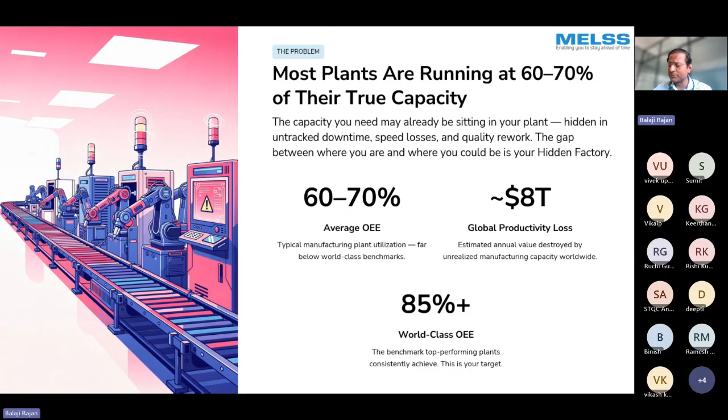If you are in the 60 to 70% range, maybe you are within the slightly higher range. Now, what is the hidden factory? Let's explore the hidden factory. What do we mean by hidden factory? Where does the unrealized capacity I'm talking about actually come from? This is typically buried across 4 loss categories that most plants are not tracking regularly, or don't know how to track, and they typically fall under these 4 categories.

It's unplanned downtime, where equipment stops are not tracked or logged, or not understood in real time. Unrecorded downtime is lost, and that's revenue that cannot be recovered. It can also be in the form of quality defects and rework, units that consume machine time but don't produce any saleable output. They just go into your rejection or contribute to your cost of poor quality. This is cost consumed with no output. This rework is basically what we call a parallel factory.

Then we have speed losses, basically machines running slower than their rated capacity, due to multiple reasons such as wear and tear, incorrect settings, or operators not knowing how to operate the machine correctly. These are all invisible factors, but they are relentless, always there, invisible, and always detrimental to your operations. And of course, the fourth one is changeover inefficiency, excess setup time between production runs. There can be maybe a large 30-minute changeover between your lines or products, causing unrecoverable loss of man hours.

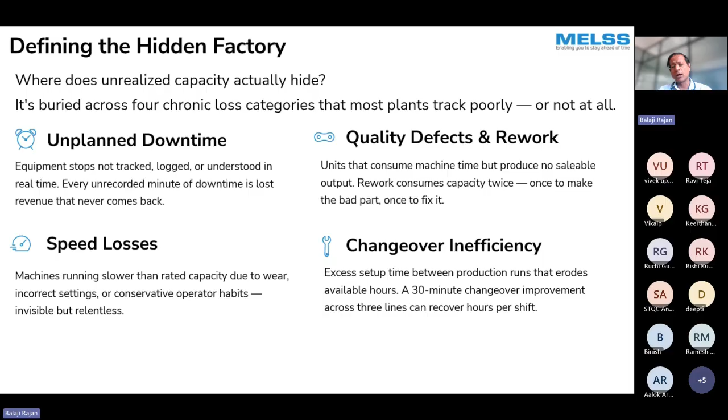Now, the challenge is very simple. The root cause of hidden inefficiency is actually the invisibility, or rather the fragmented visibility of information across the shop floor. Basically, your systems don't talk to each other, and if they're not talking to each other, the plant cannot learn from itself. If data isn't shared between different systems and departments, you cannot learn from each other and cannot make improvements.

So what does a fragmented system look like? Let's go through this. On the left-hand side, we have the before, which is fragmented. Basically, your MES, ERP, and SCADA systems don't talk to each other. They're all standing independent of each other, operating independently.

Operators are logging issues on paper or spreadsheet, but that data is already stale by the time it is reviewed and any action can be taken on it. Decisions are made days or hours after the event, and they're typically reactive, not proactive. There is no single source of truth for line performance, so every shift, every operator tells you a different story because the data is being logged, tracked, and analyzed on a delayed basis.

So this is what we call a fragmented system. This is the before system.

Now what is after? What is your North Star? What is it that you would want to aim towards? It's to have a connected shop floor. And what is a connected shop floor? It's basically a unified data layer across all the machines and systems, giving you one version of the truth.

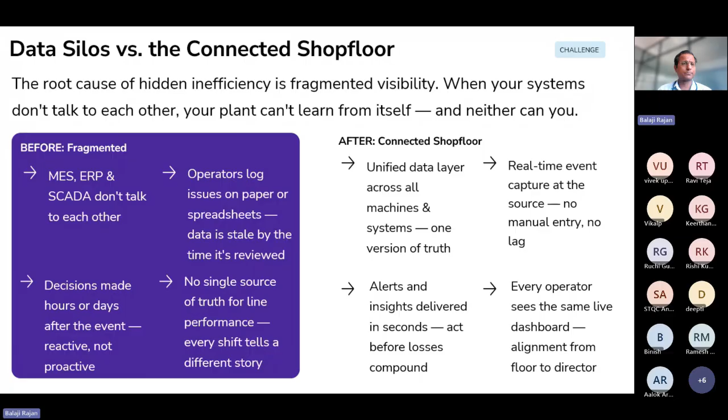Now, the basis for understanding the health of our shop floor, our operations, our manufacturing, is all encapsulated within one terminology: OEE, or overall equipment effectiveness. It's a common terminology that everybody within operations knows. And if you don't know, please get to know this - this is your best friend.

It's basically a simple formula: availability into performance into quality. These three parameters capture your entire performance across your shop floor. It's the single most powerful metric, and it's very useful for exposing your hidden factory. It is the starting point for every improvement initiative.

Just to give a brief background - what is availability for people who don't know? Availability is the percentage of planned production time that the machine was actually running. Downtime is planned and unplanned, and unplanned downtime is what destroys this metric. You typically want at least a 90% target for availability.

What is performance? Performance is basically whether your machine is running at full rated speed and capacity. If your speed or capacity is reducing because of losses in wear and tear, wrong settings, or operators not operating it correctly, then your throughput reduces. Here again, your target should be greater than 95%.

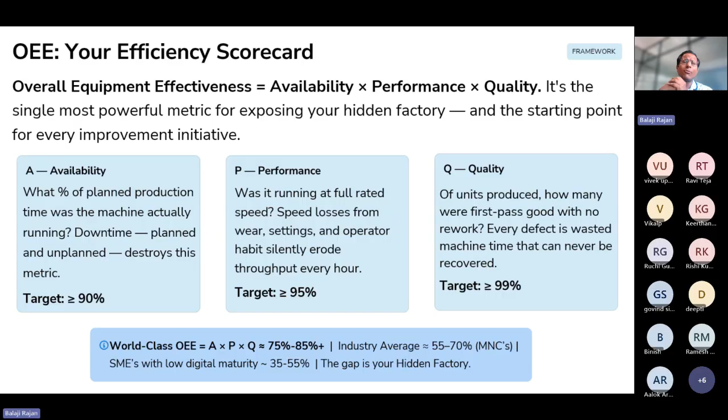Your industry average can run anywhere between 55 to 70% for MNCs, and it can be lower for smaller SMEs with lower digital maturity, maybe about 35 to 55%. This low number, the 35 to 55%, is the gap, the hidden factory. This is what I am talking about. Typically, MNCs have larger digital maturity and smaller SMEs have lower digital maturity.

To build this capability is the basis of unearthing your hidden factory. Now you can get data from the OEE, identify where your problems are, and we will get into more details as we go forward. But how do we then do this? This is the digital aspect of it, gathering the data for OEE and understanding your performance.

Now there is a physical automation stack also, and it can encompass what I'm showing below. These are typically electromechanical technologies that can attack the waste directly in the plant, and they can attack a specific category of OEE loss.

What are these electromechanical technologies? These are not all inclusive, just some of the technologies. I'm sure there are more out there, but these are some of the more important ones we use for automation. There are industrial robots, which we are all familiar with - high speed and high precision arms. You've got cobots, or collaborative robots, capable of working safely alongside humans.

You have vision systems, which are AI powered cameras providing for inspection of 100% of parts inline. You've got smart conveyors - sensor equipped conveyors with variable speed control and routing logic. You've got smart actuators and IIoT, industrial Internet of Things products - basically servo drives, smart PLCs, and edge connected sensors that can stream machine state data directly from the shop floor, useful for providing even product or part level information. And finally you have AMRs, autonomous mobile robots, which provide for routing of materials dynamically throughout your shop floor or warehouse.

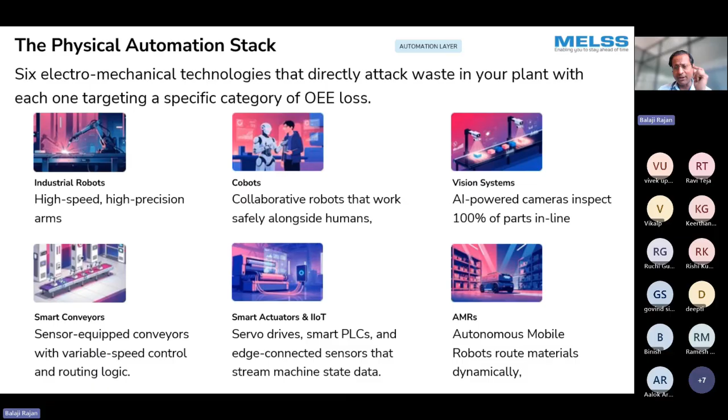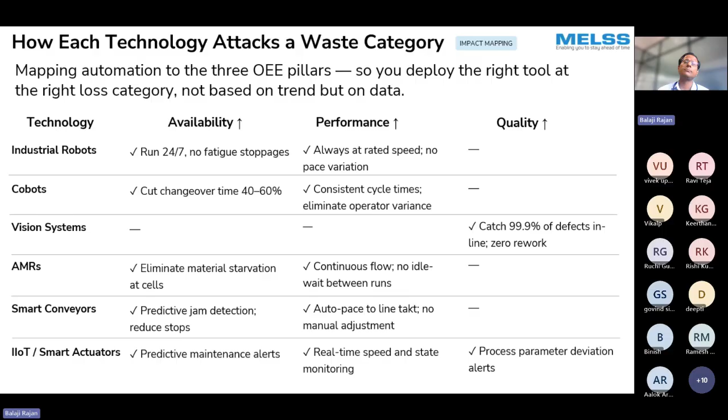Now, what is the first step in an OEE process is to find the real bottleneck, and you use real-time analytics to do this. So your line is running at the speed—we all know that the bottleneck forms the speed at which your entire line runs. The slowest operation is the speed of your total line.

So you can use real-time OEE analytics to pinpoint exactly where the slowdown is happening. You don't have to guess. You can get actual data and identify the station where this process is slow, and then fix the right place at the right time.

If I was to summarize what we are doing through OEE, we are first sensing—basically using your IoT sensors to stream machine data every second. There is no manual data entry, no shift-end delays. You're not having people entering data at the end of the shift. So this is all real-time data, sensed using the sensors.

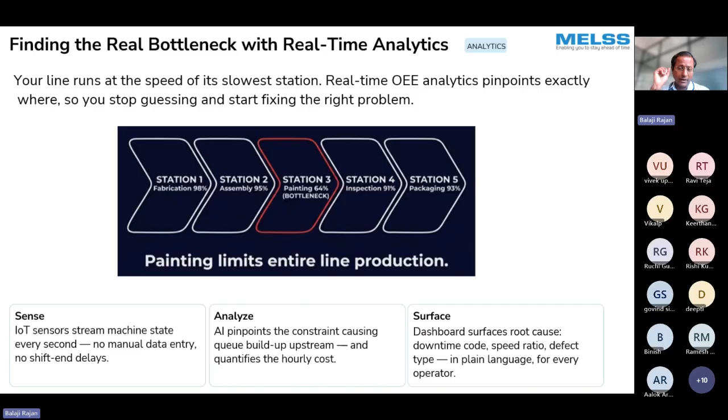So this is your analytics. Now, basically, like I mentioned, the Industry 4.0 toolkit consists of four basic categories. There are four integrated layers, what we call our digital layer, which is driving our physical automation.

Each layer is feeding the next layer of process so that it can do an analysis, and then provide the input to the physical automation. So you've got it: your data informs the analytics, analytics directs the automation, and the automation triggers the action.

Here we call it the connect, the IIoT or the edge sensors, which can be through your protocols like OPC UA and MQTT. Integration is happening. You've got smart conveyor telemetry coming in, or maybe a unified machine data layer. All these are the data or connect that is happening at the shop floor level, at the machine level.

This is then analyzed. This is where you have your real-time OEE dashboards, and maybe artificial intelligence or machine learning software that is detecting anomalies. You might even have simulators, digital twin simulations happening today that can provide live bottleneck identifications.

This analysis then provides the inputs to what automation you need to implement. Based on the analysis of where your loss category lies, you might want to do robos and cobos, or put in an AMR, or maybe a combination of the two. Maybe for your quality gateway to improve, you want to put in some vision guided sensors.

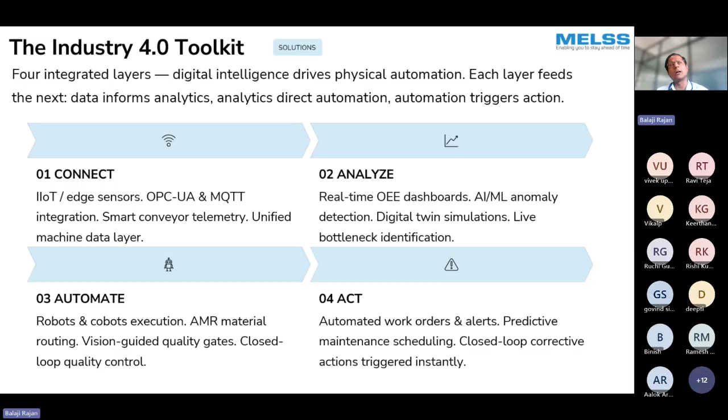These four steps are critical in how the entire digital system and the physical automation loop form a closed loop, and allow you to—again, the basis of this entire presentation—unearth the hidden factory by identifying your loss categories, your issues and problems in real time, and directing the correct automation or physical automation stack, or analysis aimed at the problem, to provide the solution.

Now, it might seem logical, but some people do ask, okay, so why should it be both automation and digital intelligence? Can't I just do OEE and that should be enough? Or let me just do automation. I know I have a problem with throughput, let me just input it. Or quality, let me just install a vision system, or install a robo or a cobo, and I'll solve my problem.

It's not that simple. There are economies of scale—if I was to use simpler technology, there is a compounding effect of utilizing both these things together. The digital intelligence that comes through the OEE analysis and the physical automation work together to give you a compounded output, which is better than utilizing each of these individual solutions separately.

So if I was to implement just digital only, you might get maybe a 10 to 15% OEE gain. Yes, today you have dashboards and your analytics are revealing the waste. But then you still have humans executing it very slowly, with variation between different humans implementing it differently. So you have the insight, but without the correct action, the output is limited and has a ceiling.

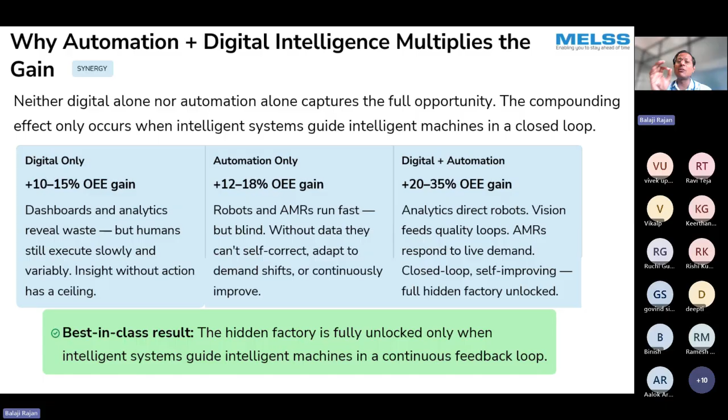So the best in class result is always the hidden factory. It is fully unlocked only when the intelligent digital systems guide the intelligent physical machines in a continuous feedback loop. This is very critical.

So I've spoken quite a bit about how we approach what it is that we do. Let's look at a simple case study here. This is not an Indian context, I've given you maybe an American context here. But again, this is an SME company, and I focus a little on SME companies because their data and digital maturity might be lower, their automation maturity might be lower, and really the ability to unlock this hidden factory is higher in some of these SME companies.

So let's take a case study of this SME company. This is a company based out of Ohio, making sheet metal fabrication as a tier 1 vendor into the automotive business. They were a small SME company, somewhere between 51 to 200 employees. Here I'm taking a very specific case of a UR10e cobot that was installed.

How did they do it? Before, they identified that their CNC and welding cells were a constraint for them. They had an OEE of about 52%. If you take the baseline, they had a welding throughput of say 1x, that is the baseline. And their CNC machine utilization was about 32%, and they were only doing the day shift.

Now, they needed operators across 4 cells, so they needed 4 welding operators across these 4 cells. And the defect and rework rate was almost 3.8%, which is pretty high. And they couldn't do any lights-out production, that is, there was no night shift capability, maybe because they weren't able to get labor or manpower to staff those night shifts.

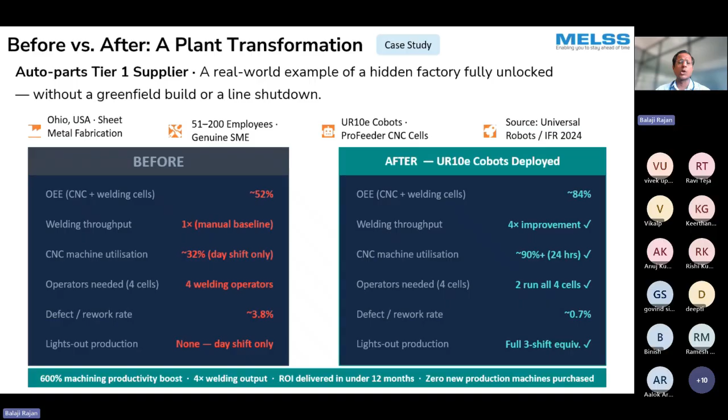So these are some of the numbers that came out through the case studies. Let me reiterate, this is for SME companies, and typically SME companies have a lot of gaps, and a lot of improvement can be realized at very good ROI by implementing such plant transformations as I've shown. This is not the only way, this is just one case study. There are multiple technologies that can be implemented for various loss categories and improvement situations, and the ROI can be calculated for each of these situations.

So what's the roadmap? You've seen what can be done. Let me tell you, this roadmap is the same whether it's a large MNC company or a small scale company. It's a very practical 3-phase implementation path you can follow. You first start digital. You need to start collecting data, doing data logging to get your information in real time. Let the data tell you where to automate. Then you deploy the physical automation exactly where it has to have the highest return.

The first phase is what we call sense and see. You can do this between months 0 to 3, where you deploy the IIoT sensors and edge boxes or edge gateways on all the lines. You connect all the MES, ERP, and SCADA data to create a single unified data layer. You launch your live OEE dashboard for every operator, or a consolidated OEE at a central monitoring location. You use this OEE data to identify the top 3 bottlenecks with data, not on opinion, not on feeling, but on what the data is actually showing you.

The second phase is what we call automate the bottleneck. This can be done between months 3 to 9. You deploy the Kobo or Robo at the identified constraint station, install vision systems, maybe on the highest defect rate step. I'm just giving you different automations you could implement. Or maybe you deploy AMRs for the top material flow routes, wherever you have routes with the maximum material flow. Finally, you validate the OEE lift: what is the baseline, what is the target, what is it currently, is there an improvement and what is improving. You do this line by line wherever you have identified these issues.

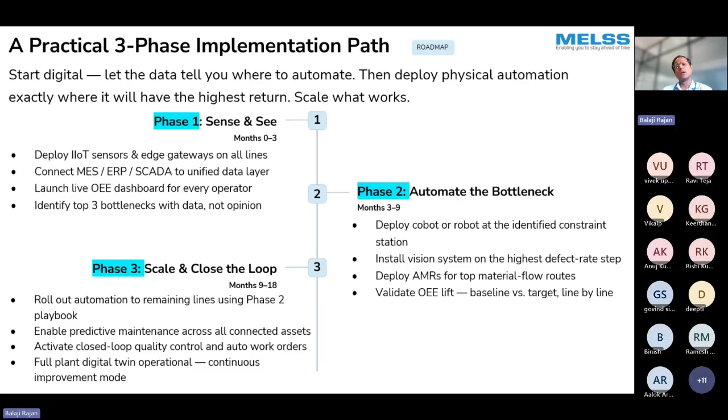So this is a practical three-phase implementation path, or a roadmap, that any company can utilize in their systems, right? Now, let me take a little bit of a deviation.

I was telling you about how to identify the hidden factory, what are the technology involved, how do you do it, how do you unearth it. But there's a step that happens even before this, and this is applicable whether you're in sales and marketing, or a business development executive in an automation company looking to work with another manufacturing company. This holds true also if you're a plant head, an operations head, an engineering head, or a lean practitioner within an organization getting started on the transformation process within your own company.

Because let me tell you, even within your own company, you're going to have hurdles. You're going to have conversations with decision makers where you have to show, convince, or prove that what you are doing is correct, and whether the path you're taking is correct, right? So the next few slides will take you through how do you run this process, how do you start the conversations, what are the questions you ask, and how do you do this process of transformation within your own company, or if you're a sales and business development executive or a lean practitioner for other companies.

So the best entry point to start is to identify a specific operational pain. Now typically, whether you're external people or internal people, you're working with your plant directors or operations head. It could be a CTO, a CEO, a CFO, it doesn't matter. You have to answer to these people when you say, hey, listen, there's a specific operational pain that I want to address. But you also need to be able to speak the language - it can be takt time, throughput, OEE, cost of poor quality, it could be in terms of SPC, but you need to be able to speak the language of the shop floor.

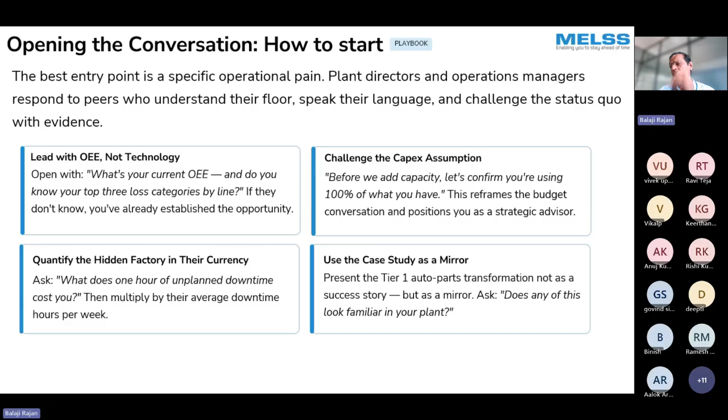I want to reiterate, everything I'm saying here is applicable whether you're internal to the company trying to do automation within your own company, or whether you're an external sales and business development executive in an automation or system integrator trying to do automation implementation within other companies.

Now, these are all questions. And like I said, there are decision makers at the senior most levels, your C-level executives, etc., who are going to be asking you questions about why you're doing what you're doing. I'm just highlighting here some of the questions that come up. In our experience, we have done this quite a bit, and these are some of the things that come up. You also need to be asking the right questions towards the right people.

This is also very critical. Please know that you can't ask the same question at the operations or operator level as you would the CEO or CFO. They'll be thinking about completely different things than the operator level.

So OEE and capacity questions could be anything. What's your current OEE by line? If you could add 25% throughput without new equipment, where would that capacity go? Towards your orders, margins, or both? How often are you running at full rated speed across every station? What was your worst downtime event? Did it happen last quarter, this quarter? And how long did it take to diagnose your root cause?

These are all questions that a good manager or an operation head should know in order to run their operations well. It might be an operations manager, it could be at the operator level, it could be at the CTO level, it can be at any level, but these are information that people need to know. Only if they know this can you be confident that they are running their operations well.

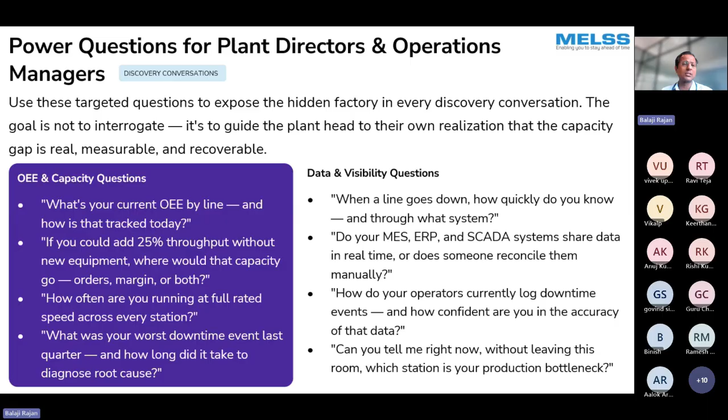So these are all powerful questions that need to be asked. And if you're finding that there are no responses or the responses are poor, whether you're internal to the organization or external driving this, these are important questions, and the responses will tell you the health of the existing system. It will help guide your conversations towards directing plant heads, CEOs, CFOs, or operations managers towards implementing these transformations.

Now, typically you will start off, there are two types of conversations you can have, and only one guarantees a strategic win. So when you're into industrial automation, the first conversation everybody asks is typically equipment selling. Everybody's like, I want to put in a robot, I want to put in a cobot, and you're always talking about the equipment. The question is, can your robo weld this joint? Can your system improve this? Can your system equipment help me with this?

Now, that decision and that buyer and that problem is at a very different level, whereas the transformation you're selling is a very different question. The question at the highest level is, can you reduce my unplanned downtime by 30%? I am not talking about equipment, I am not talking about selling a product, I'm talking about the transformation. Can you reduce my unplanned downtime by 30%? Or, I can reduce your unplanned downtime by 30%. This is the conversation starter for transformation, this is where we need to start. And these are decisions typically taken at the CXO or plant director levels.

The buyers, the people making decisions on these investments, are typically at the CEO or head of manufacturing level. We have evaluations being done at the business case and ROI proof levels.

We have key variables: transformation, credibility. These variables are critical. Transformation credibility comes from asking the right questions and providing the right solutions. The relationship is that you're coming in as a long-term solution provider.

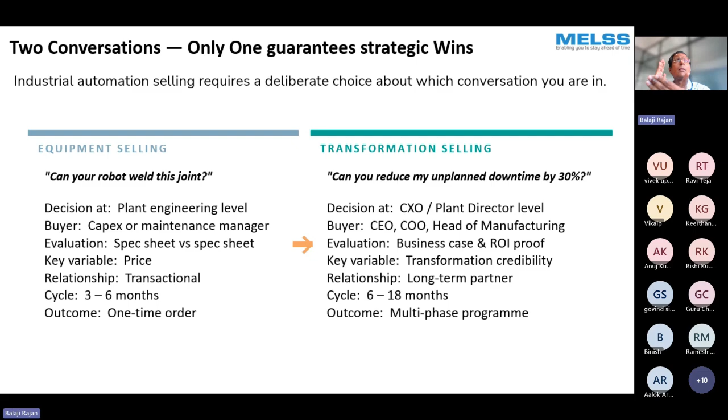Cycles are typically 6 to 18 months, and we are looking at a multi-phase program. Like I told you: phase 1, phase 2, phase 3. Implement small first, extend it out to automation, then parallelly across to other lines.

At the highest level, talking about transformation and implementing and driving the transformation are two very different things. To drive and ensure that this happens, the three things you have to take into every transformation are: understand the outcome, not the technology; build the business case before the proposal; and position yourself as the person who's going to be your partner in the long term.

Whether you're an operations or lean practitioner within the organization or an external business development executive, you are here for the long term to provide a solution, not a short-term equipment manufacturer seller. So that's the most important thing that we look at.

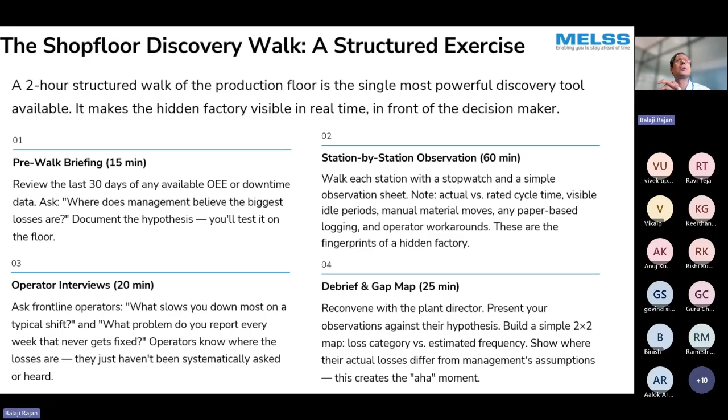This is very critical, where you put everything together: you build a simple 2 by 2 map of loss category versus estimated frequency. This mapping is a very critical step. It shows where the actual losses are and drives the aha moment - okay, this is where the issue is, this is where the problem is. Let's now drive our solution or implementation towards this problem.

What do you normally look for when you do this discovery walk or shop floor walk? You look for availability signals: machines are stopped, operators are waiting, there are long startup or shutdown times, changeover boards or paper-based sheets are being used. Quality signals: rework benches, manual visual inspections, scrap bins that are constantly overflowing, or end of line sampling instead of 100% inspection.

What are the performance signals? Maybe there are machines running slower than normal, maybe operators are manually pacing up and down the line looking at where the buffers are. Maybe there's WIP piling up at a certain stage, or you're seeing material starvation with no input at a certain point.

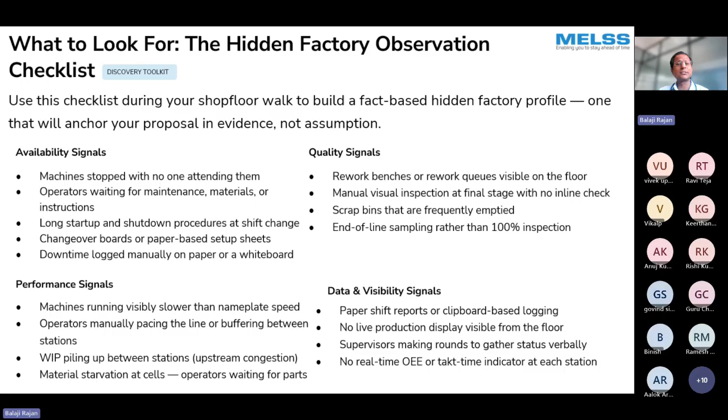The objection handling, we will come back to - I'll skip this slide because I've already addressed the objection handling in the previous slide with the discovery process. But do note, you will hear things like, we've tried automation before and it didn't work.

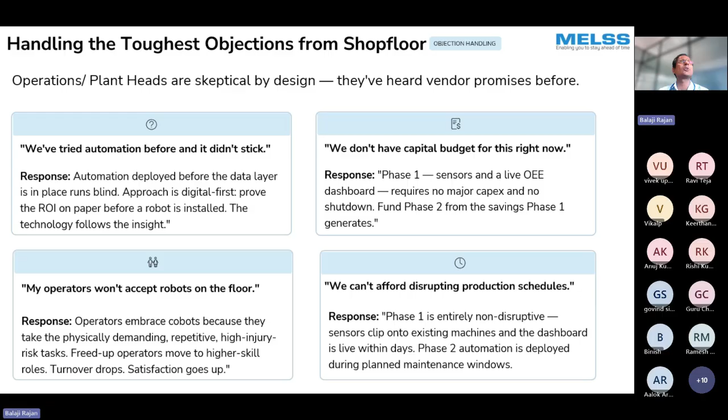We don't have capital budget for this right now. My operators won't accept robots on the floor. We can't afford disrupting production schedules. These are all things which can be avoided by going through the discovery process that I've already mentioned.

My final slide here is MELSS can help you with all of the above. We've been into this for many, many decades now. Your next capacity expansion exists within your own plant. We can help you - the tools to unlock it, both digital and physical, exist today, and MELSS has all these capabilities in-house. The intelligence to unlock them is here.

The only question is, how much longer will you leave it hidden? Do you want to do it right now? MELSS can help you unlock this hidden factory. Reach out to us today and we will help you with the scope of work - what is it that we will do?

We will help you audit your processes, measure OEE and map the data. We will help you even implement the OEE - we have our own software, our own inbuilt software and data, software systems, and software engineers who can do this work for you.

We can identify and map your bottlenecks and pinpoint the actual issues digitally and precisely. And finally, we can implement and pilot your deployment automation at the constraint sectors. So MELSS is capable of working with you at all levels, whether it's instrumentation, control, electromechanical, software, or IIoT and edge networking - we have the capabilities to do all this with you.

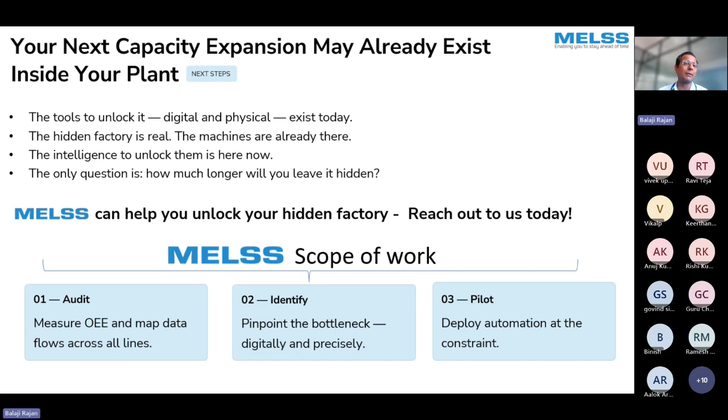So please do reach out to MELSS, and we'll be very happy to work with you over the long term to help you unearth your hidden factory and the hidden capacity that you have within your existing plant today. Thank you so much for your time and for listening to me today. I'm open to questions - we have about 5 to 6 minutes, and please feel free to raise them here.